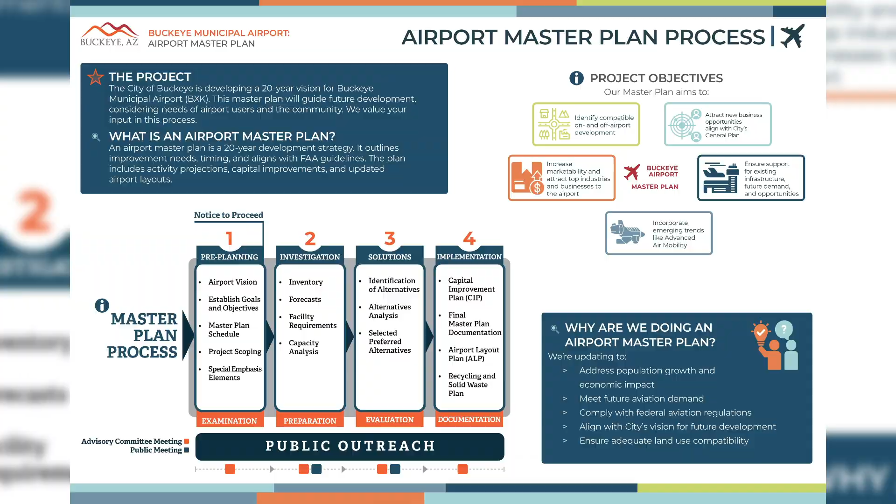And then we develop alternatives, and then we develop a capital improvement plan, which basically phases the development out so we can figure out how we're going to fund those elements. So very briefly, that's the process that we go through. Always in an airport master plan, there's a public engagement process. That's what this meeting is intended to satisfy tonight. This is the second public meeting that we've held. The first one was back in September. This graphic represents what's available for public engagement and its importance to help guide the airport development.

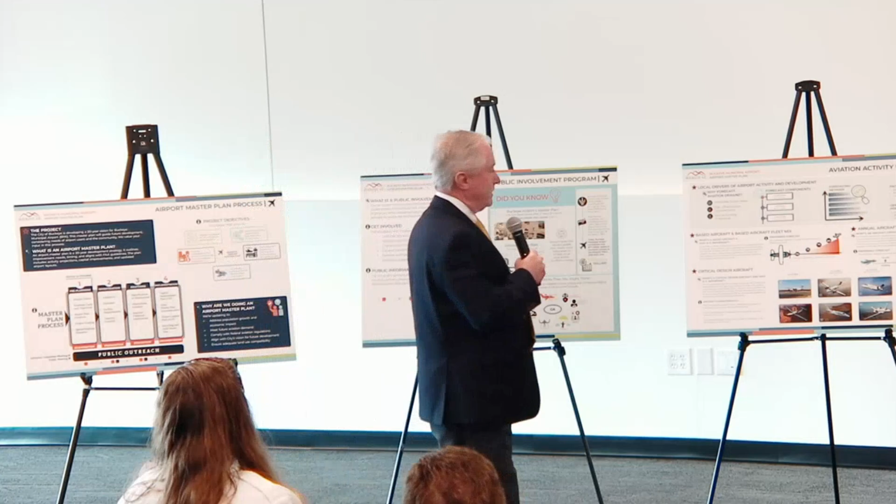As I mentioned, we did an aviation demand forecast, based on 2024 data. Today we have about 79 aircraft based at the airport. We're forecasting that to go to about 89 long-term. So a pretty significant growth for the number of aircraft that we anticipate being based at the airport. In terms of operations, currently there are about 122,000 operations. We're forecasting that to go out to about 166,000 operations over the course of the planning period. Again, these are just forecasts. Reality is always somewhere in between what we forecast and today's activity.

The aircraft that currently operate at the airport are envisioned to continue, but we do envision larger aircraft. They're designated by letters and numbers. We won't get into that detail, but for example, the existing aircraft today are categorized as A2 aircraft. We're envisioning that in the future, it'll go to B2 aircraft, basically a little bit bigger airframe. And then ultimately, we believe the airport could see C2 aircraft, which are much larger, business jets and so forth. So we go through that planning process. The forecast goes to FAA for approval.

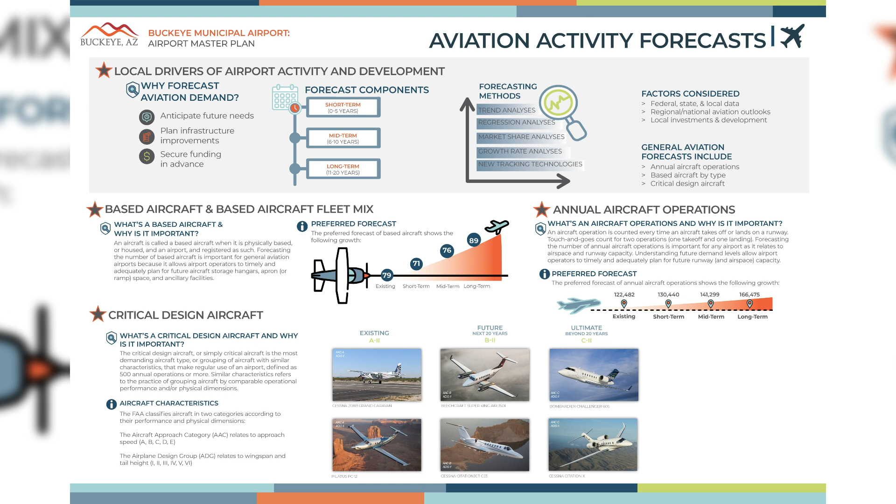Once we get an approved forecast from FAA, we develop the facility requirements, basically looking at what do we need to do to the airport to satisfy that demand that we are forecasting. So we look at what we need in terms of runway capacity, runway lengths, taxiways, aprons, hangars, all those support type facilities, fueling facilities. We develop a matrix that delineates what facilities are needed to satisfy the aviation demand forecast, and then we develop the alternatives.

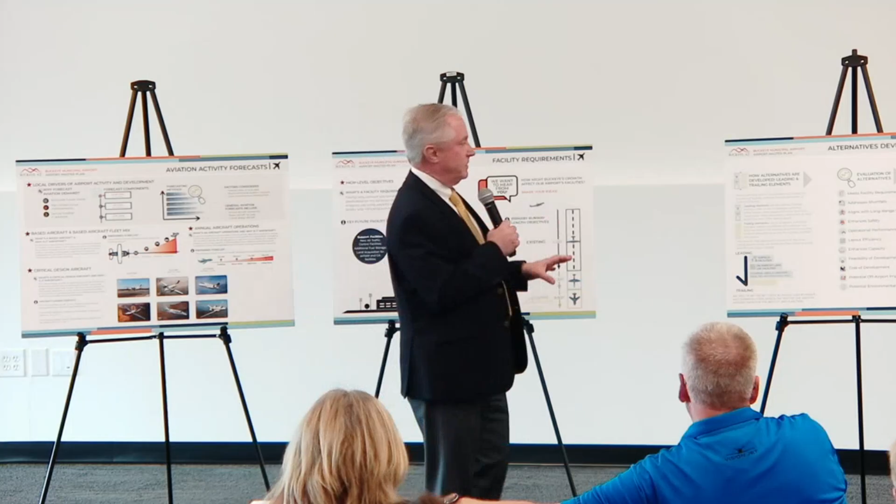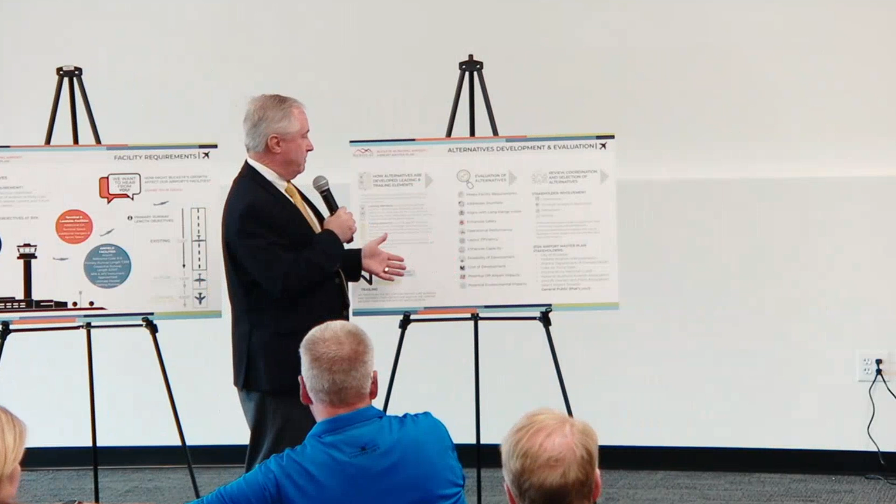So when we look at alternatives, we come up with how are we going to configure all those improvements on the airport in the most economical, safe layout. All of those metrics are considered when we look at how we are going to achieve those alternatives. Certainly cost is always a big factor, as is potential environmental impacts. So the alternatives are measured against the matrix of how we evaluate them. We rank them, we score them, and then we push forward with the various alternatives to see how we're going to achieve that.

So when we look at the facility requirements and how we evaluated them for the primary runway, we look at extending the existing runway out to 7,300 feet, which gives us an extension to the north. So we came up with 3 different alternatives to achieve that. One puts the entire extension to the north. Another one shortens it up, so we keep the runway protection zone a little bit shorter, and we can get the road around. So basically, the second alternative gets it out of the highway right-of-way. So we slid it down a little bit to do that, and then to accommodate the 7,300, we have to tack on a little bit on the south end.

The third alternative is pushing it even further, so we can get the road around and get the RPZ and the road away from each other, because we like to have the road outside of the RPZ. That's a real important aspect for FAA. So when we do all that, we evaluated it. The recommended alternative is the first one here, which again, I encourage you to come up and take a closer look at, but it puts the entire extension on the north end of the runway.

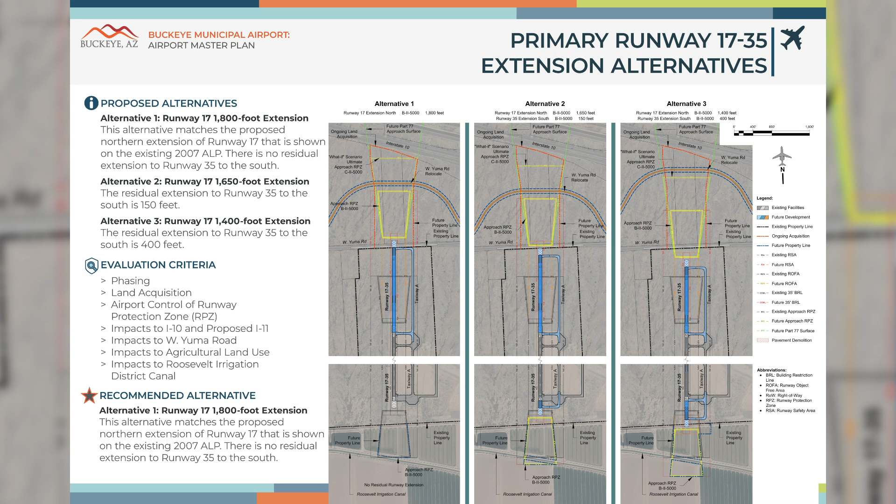So now we know that there's a crosswind issue at Buckeye, and we look at ways to solve that. If you were here at the first public meeting, or if you looked at the chapters that are available online, we know that there's a crosswind challenge with the existing runway. So we look at, well, how are we going to solve that crosswind coverage issue? FAA has in their guidance that one of the ways is to widen the existing runway in lieu of a crosswind runway. That's not the preferred method of addressing a crosswind component, but it is one way to address a crosswind element for your primary runway.

And most of the time you see that if this runway was in a canyon and there were mountains, and obviously you can't build a crosswind runway. So perhaps widening the primary runway would be the best that you could do. But we know, given this environmental setting, that we don't have a situation like that. So we can look at ways to address the crosswind by constructing a crosswind runway. And we also have to consider the potential of widening the existing runway to address that wind coverage issue.

So we looked at widening the existing runway. We looked at various configurations for a crosswind runway. And again, coming out of our first public meeting and the first chapters, we identified that the alignment for a crosswind runway would be best served at 10-28. So all of the crosswind runway alternatives consider that alignment.

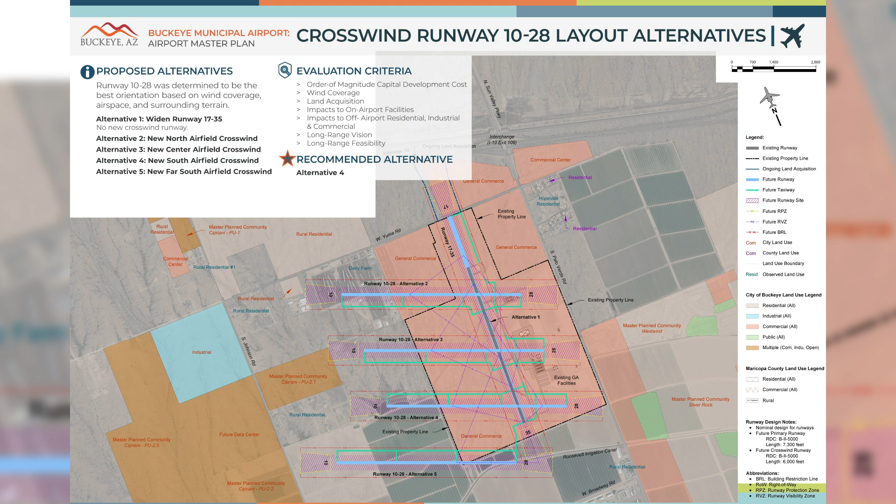So when we evaluated that against the criteria of wind coverage, land acquisition, costs, feasibility, we arrived at alternative number 4 as the best location for a future crosswind runway to satisfy that wind coverage issue. As I mentioned, we considered widening the runway, but when we evaluated that, still alternative number 4 in this location is the best location for a potential crosswind. We do show it at a length of, what do we have for a length?

6,000. So we show the crosswind runway length at 6,000 feet. Okay. And again, we're going to talk a little bit more about the future of that crosswind, but for the short-term initial construction of a crosswind runway, we have it shown at 6,000 feet.

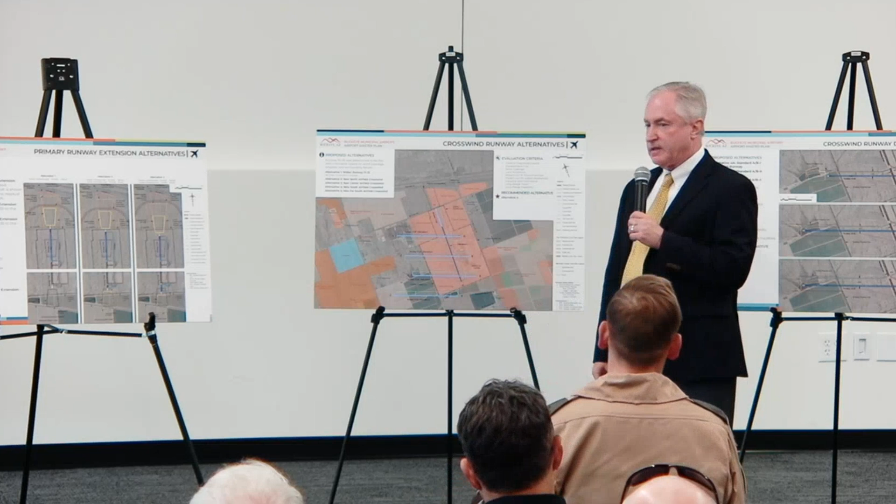Right. So this footprint, there's a runway to taxiway separation standard that we have to achieve. So we looked at alternatives to widen that out. Again, a 400-foot runway to taxiway centerline separation is the most desirable. But to meet FAA standards, we could narrow that up. So we looked at ways to narrow that separation to reduce the impact and to see if there's more efficiencies in keeping it closer. Most always, you're going to want to try to get the 400-foot runway to taxiway separation if you can achieve it. There is an issue with eligibility, but there are ways to work with FAA around that if you can justify it.

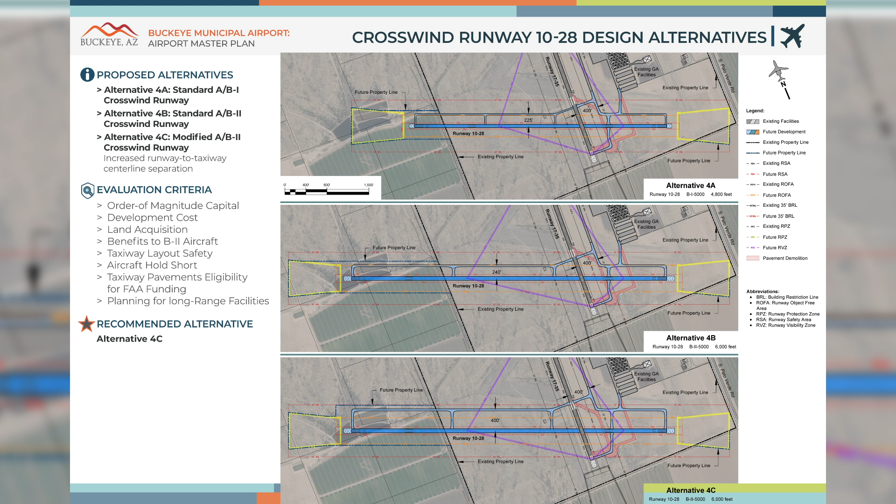So for the crosswind alternatives, refining those a little bit, we arrived at the bottom one here, alternative 4C, as the recommended alternative for the crosswind. Okay. So now when we take that alignment 4C and we project out to a 10,000-foot runway, we hold the east end of it and we extend to the west to give us the 10,000-foot alignment. When you look at the alternatives for the runway extension, the crosswind alternatives, the refinement of the crosswind alternatives, this is the recommended plan that we arrived at for the planning period for the airport.

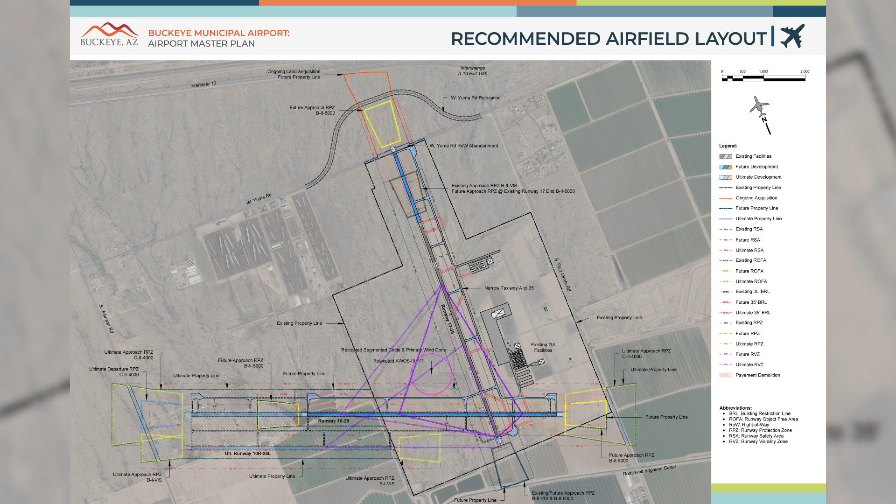Again, recognizing that we want to make sure that we can accommodate an additional extension for that crosswind, because ultimately, when you go through our document and you read the logic behind it, at some point, this main runway could be changed over, and this could become the primary runway for the airport. So we want to make sure that there's adequate space, land availability to get us out to 10,000 feet on that crosswind runway, which could ultimately someday be the primary runway.

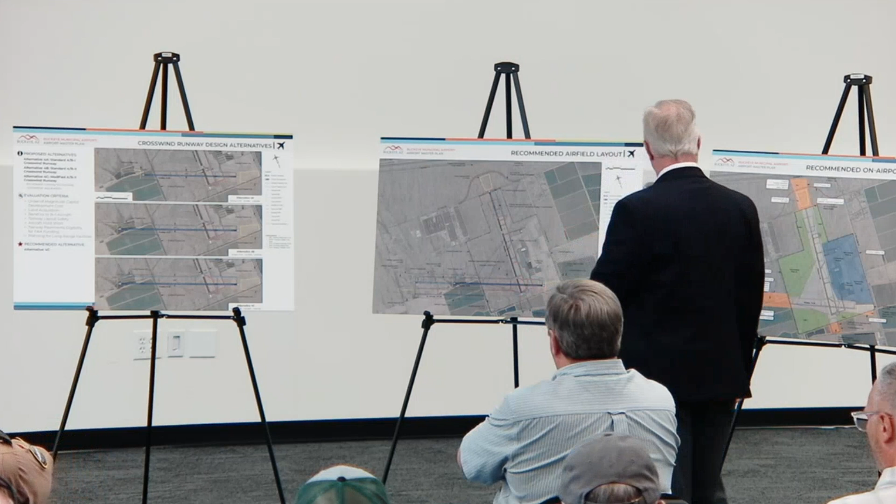Okay. When you look at the surrounding land uses, certainly there's going to be an impact. What land the airport owns, what land the airport is going to need to accommodate that future crosswind, potentially future primary runway at that alignment of 10-28 out to 10,000 feet. So this graphic shows the land uses around the airport, and what land would need to be acquired to accommodate that. Okay.

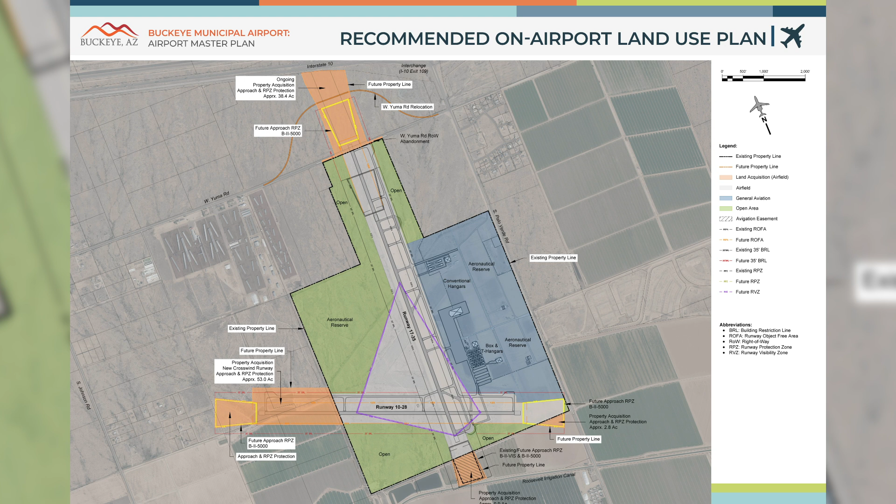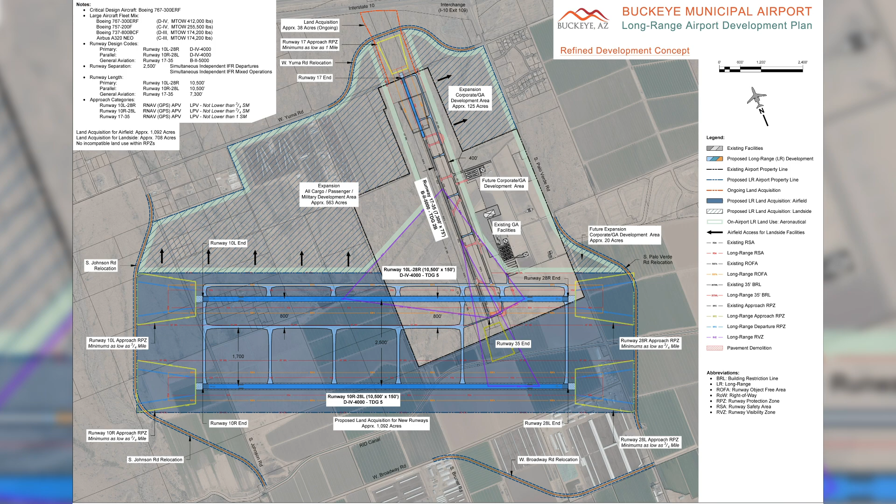And then the last one is a carryover from the recommended, and then we add in a parallel, again, just to show how the airport could grow to accommodate ultimate development at the airport, whether that's through the addition of cargo, military operations, commercial service, whatever demand presents itself. This configuration basically allows the airport to grow into this ultimate footprint.

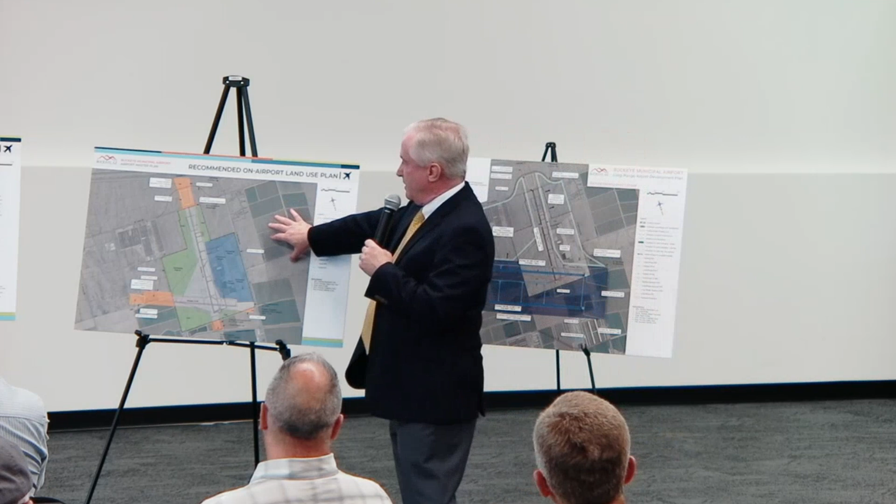Okay. When we look at the airport master plan, this layout would be the layout that we would present to FAA, and we would seek to develop into the airport layout plan which FAA would approve. But this layout gives you the ability to grow from that to this ultimate vision of what the airport could do. Okay. So I know that's a lot of information, but Scott and I and Thibaut, my support, can answer your questions. Charlie, thank you for that presentation.

Let me just clarify the difference between all of these boards and the last one. So all of these boards are to get us our requirements for our airport master plan, which is a standardized study that all airports do, looking at a 20-year time frame. That's the standard, and you can only justify the things that are in that 20-year time frame based on what FAA approves on the forecast that Charlie was talking about. While the forecast that has been resubmitted is not very aggressive, in my opinion, it's likely we will reach those numbers sooner than the planning periods that have been identified. So we'll likely reach some of those triggers before the 20 years is met.

The last study is a subset of the master plan, which is called the Airport Long Range Plan or Airport Long Range Development Plan. That's looking beyond what FAA can approve and review. That's a vision that the city has for what we believe this airport can transition into in the longer term. Just because it's the 20-year to the 40-year time frame doesn't mean that's when it'll happen. It could happen sooner. It could happen later.